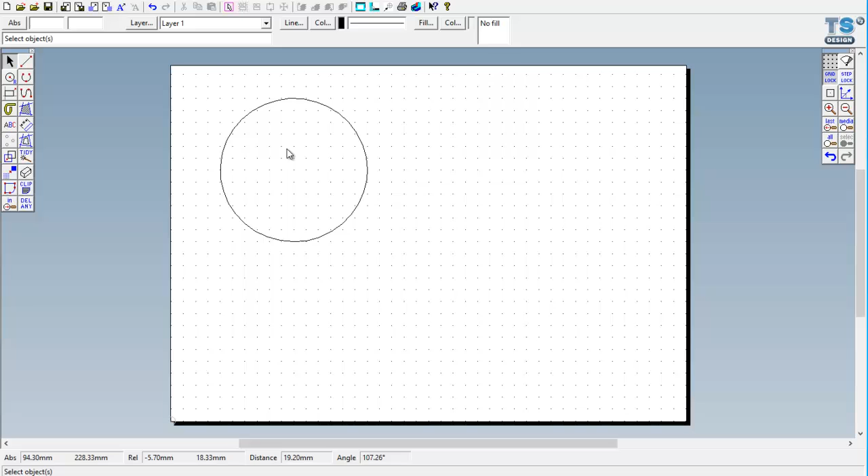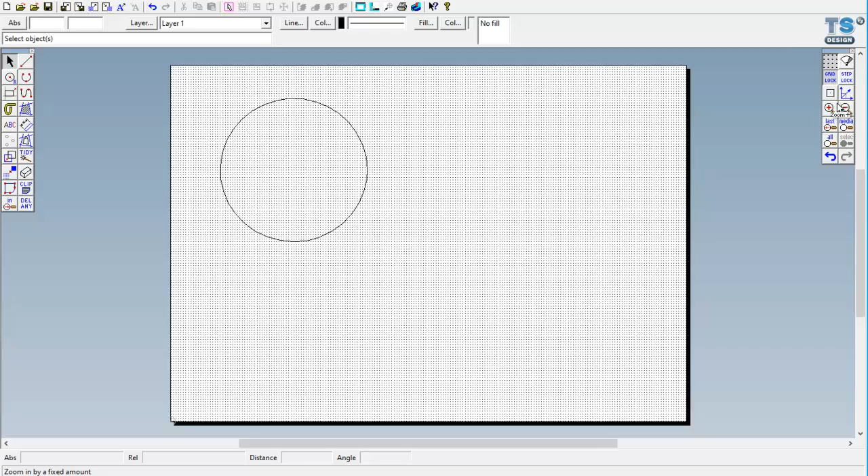At this point, I need to then make the circles or the perforations where the holes are going to allow the sound to come out of the machine. So to do that, I'm just going to double click onto the grid, and this time I'm going to change the X and the Y to 2, and that should set the grid to 2 millimeters, and then I'm just going to zoom in so I can see what we're doing a bit easier.

So the next stage then is to draw the circles that we want to go through. Now I know that the circles will need to be about 3 millimeters, so the radius in this case will be 1.5 millimeters, and I'll just click onto OK, and I can just start to draw either inside or outside. So on this part, what I can do is just click and draw each one of the holes that we need for each part of the speaker.

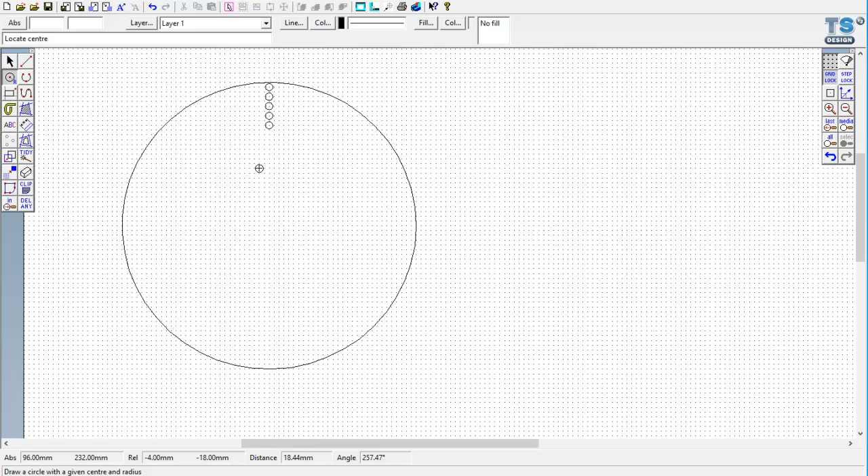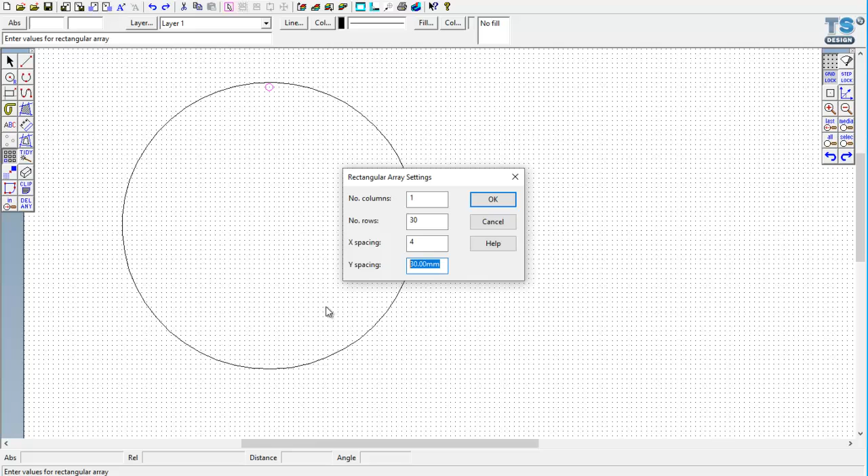Now that's going to take some time, so there is a quick way of doing this, and the quick way is literally to select the one, click onto draw, transform, rectangular array. How many columns? We just want one column at the moment. Number of rows, we'll probably need around 30 just to start off with, and the spacing, because it's set at 2 millimeters on the grid, I'm just going to change that to 4 and click onto OK, and then what should have happened is it should have made me a line of circles that I can just move down into position from here. So let's just zoom back in just to make sure we've got what we need.

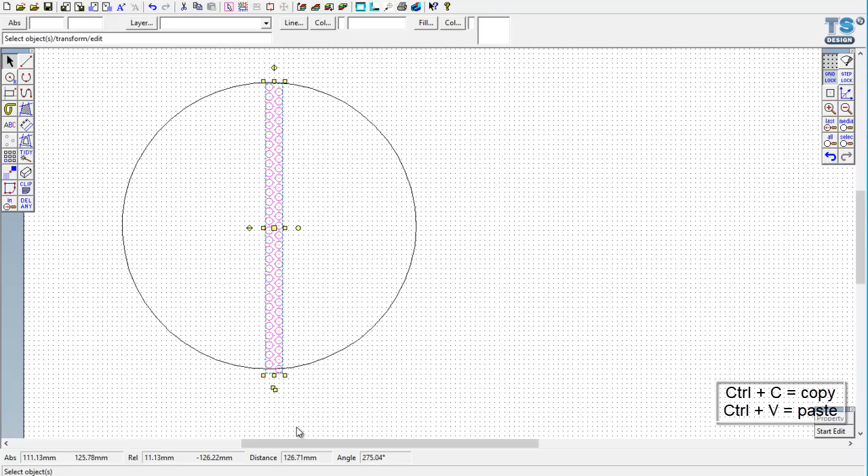Okay, so we find that sometimes it's going to cover and sometimes it's going to cut some of the lines, so I'll just see if I can move it up. There we go, and it's actually fitted perfectly into that line. Now what I shall do now is just copy that group by clicking that at the bottom, and this time I want to offset it slightly so it's actually not all in parallel. So I'll do exactly the same, copy those, and then once we've copied it, I'm just going to then place it right the way across this circle, and then we'll look at trimming with the trim commands. So again, this shouldn't take too long, so I'm just replicating each part as we go through.

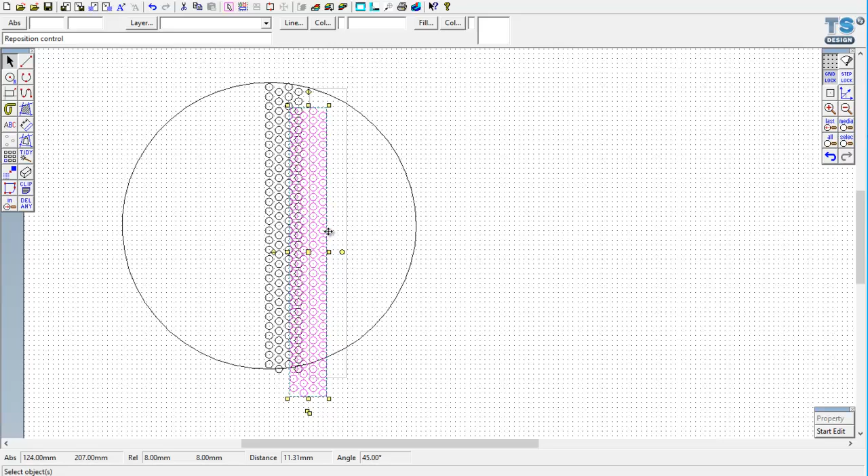Now the laser cutter works very similar to how a printer would work, so it has an X and Y axis, but instead of just printing using ink, it actually uses light just to cut through the material. So I'm just going to copy that one.

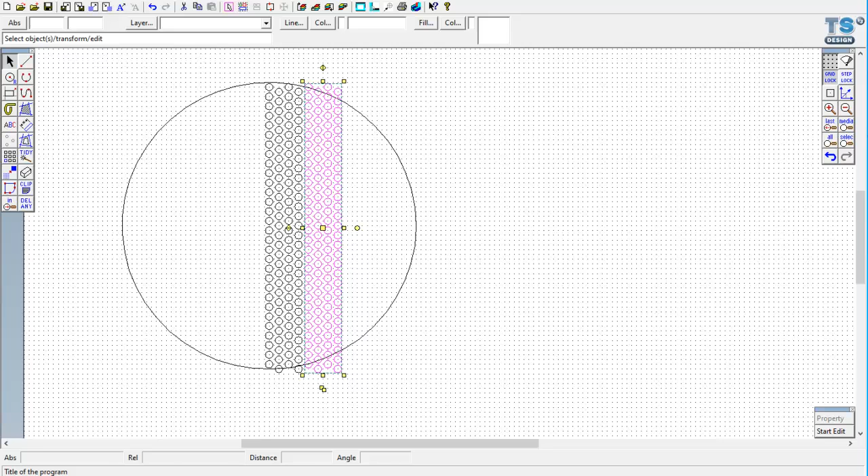Copy this part on here and move it across. So ideally, when we send this to print, we need to just make sure that we've got every line that we need to be cut out in black, because black is what's identified by the CNC DXF file as what needs to be cut out. Anything that's red would be engraving.

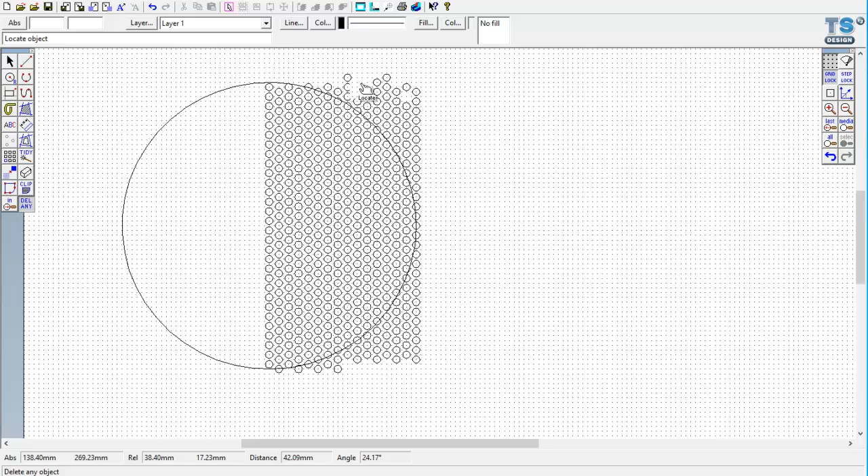Now at this point I can just delete the bits that I don't want outside the circle. And then all I'm going to do, when I get a bit nearer to the circle, is change to trim, so it'll trim but still keep the profile of the circle. So anything that's whole at the minute, I'm just going to delete these.

Now I'm only drawing it on the one side because then I can copy it and flip the drawings onto the other side. So it's just a quicker way of doing it, and that's part of the advantage of using computer-aided design over normal drawings.

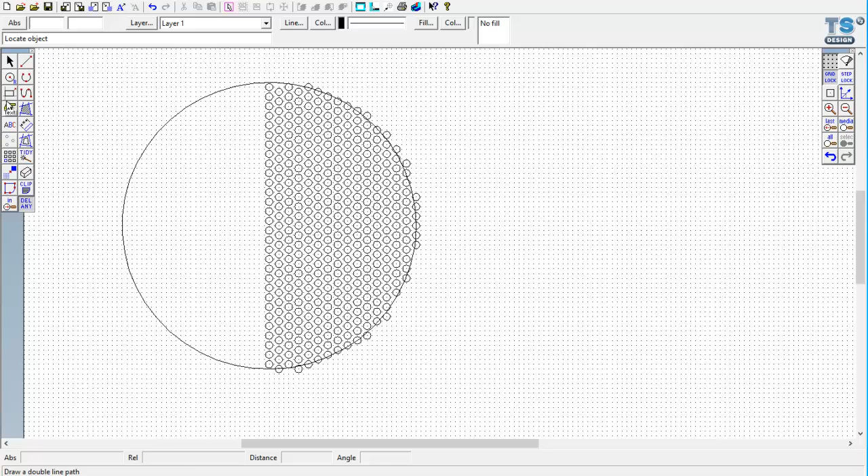If I'm doing engineering drawings and I make a mistake, then I have to redo the drawings and they're hard to modify. Using CAD allows us to make modifications very, very quickly, and also allows us to zoom in and zoom out and all the other functions that we can't really do that well with a traditional drawing board. So at this point I'm just going to delete some of the lines. Just going to the outside, I'm going to delete the ones that stick outside of the circle.

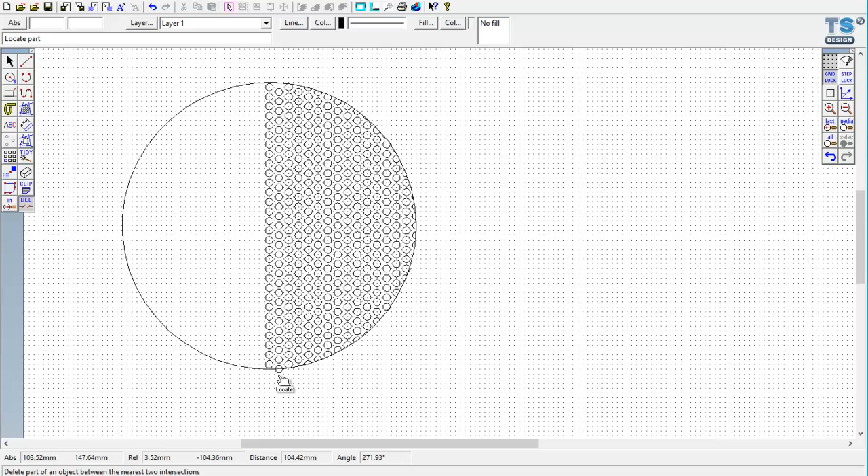Now I'm not going to delete the circle just yet, but what I should be able to do now is flip it from this point, because we know that that's the center. So now if I copy this element and copy, but then just flip it using this side, what I should be able to do is just move these circles back into place to fit on the other side.

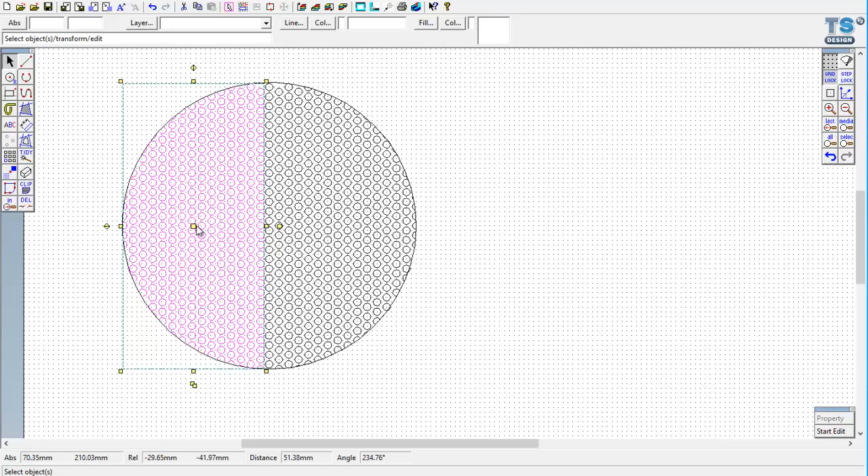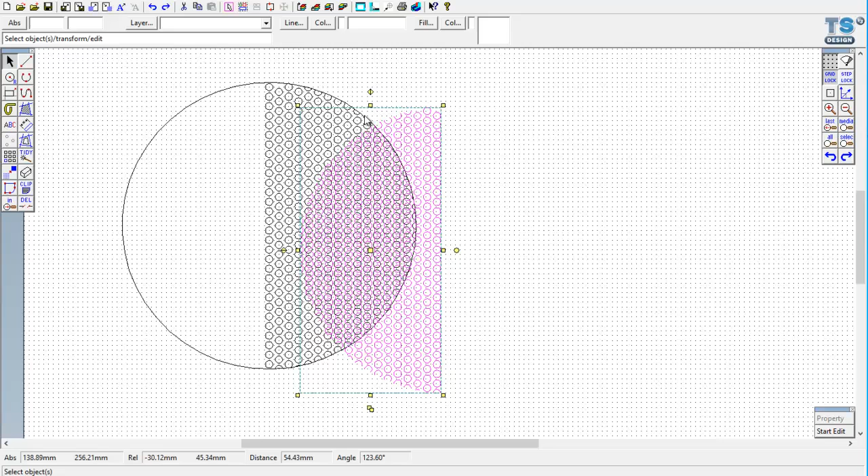Okay, now some of the circles aren't quite where they need to be, so at this point what I may need to do is move some of these slightly outwards. So if I just undo what we've just done, try it again, and then make sure that we've got the snap and the grid where it needs to be.

Still looks slightly out there, so let me turn the snap lock off and just see if we can move it slightly. So these are all the functions that we can do that we can't necessarily do when we're drawing by hand. That's still not quite that. Okay, so just slightly down.

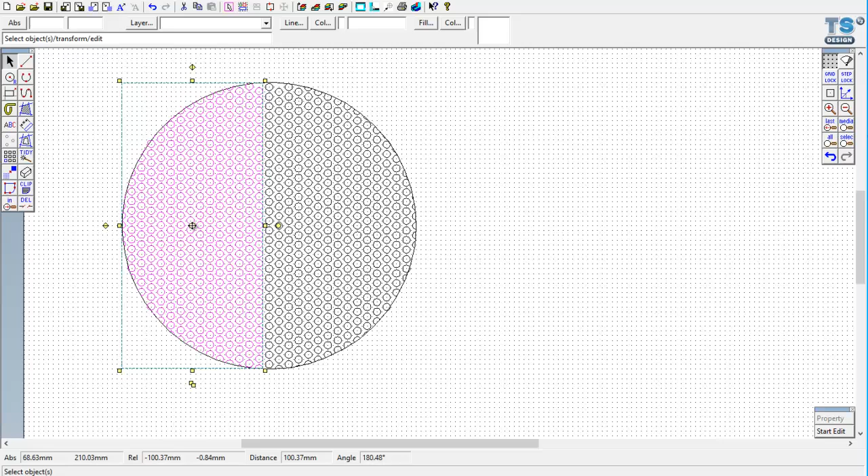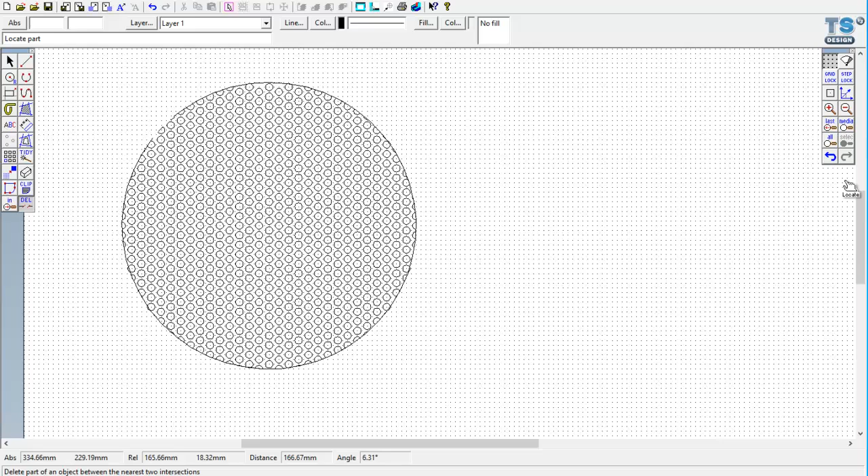There we go. So now I should be able to trim these just the same. So any line that's on the outside, I should be able to trim. So at this point, what I'm going to try and do is just delete any line that doesn't look as if it's circular. And if I need to zoom in again, I can. So anything that we don't want, we can always undo.

But it's just a case of trimming in between these spaces here, and that's going to give us the idea that there's a circle part going through, even if they're just small holes of the impression. Now we're going to be cutting this out of acrylic, and we're going to try and use a colour that's going to blend in with the decals that we've got.

So this bit is a little bit tricky, it does take time, but of course it's worth taking the time because we haven't got to worry about the time that we need to manufacture, because this will literally cut it out in probably about 2 or 3 minutes.

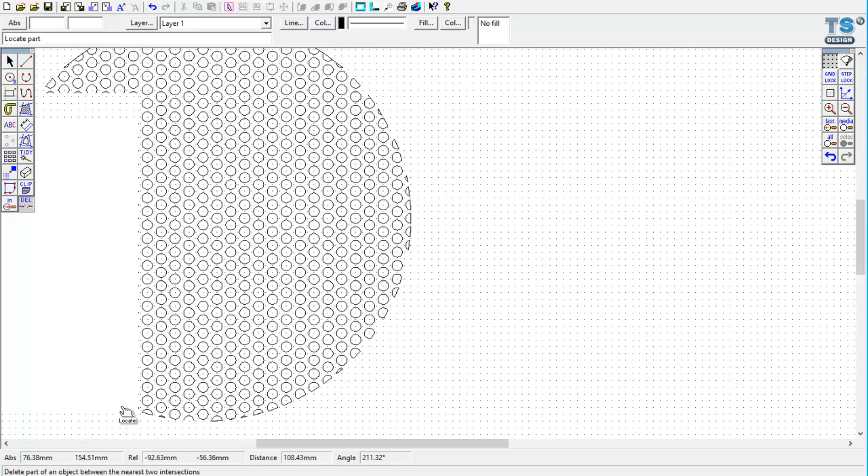Now this is really the same sort of process that would happen in industry. So a CAD designer would be making a drawing ready for the machines to cut and manufacture. And certainly with prototyping, it's easier to do it this way than to get all the tools and the machines set up to find that actually it doesn't look good or it doesn't work. So a good way of prototyping is by using CAD packages. So we're almost there.

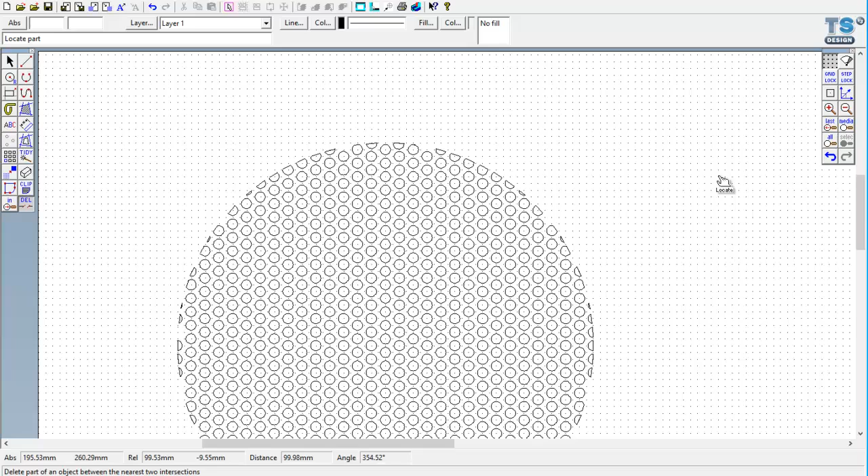Alright, I'm just going to replace that one there because I actually think we should have some more circles. So I'm going to draw these in manually. We're not far off now. So the next stage would be then to refresh the drawing just to check what we've got. So I'll hit refresh, and that's not looking too bad, if I'm honest. It's looking okay.

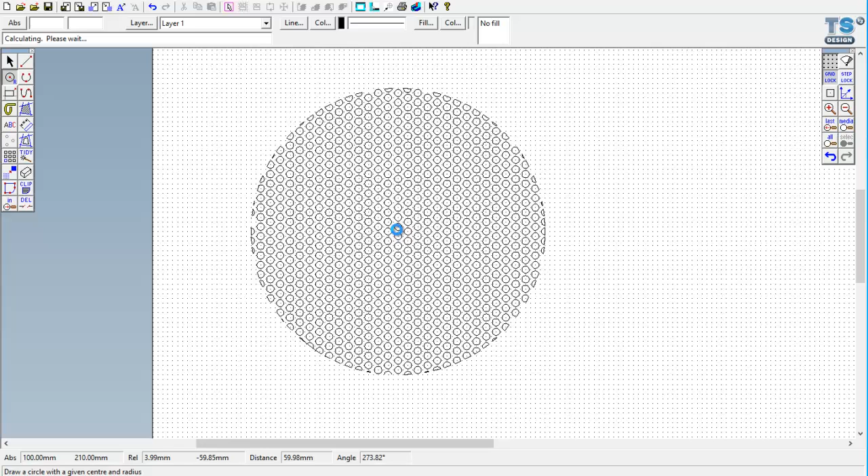Right, so at this point what we'll do next is we need to click back onto our radius, and if we set it to 126, so that would be 63 radius. Click onto OK, and if I can just find the center again, which is going to be with the gridlock, so it's going to be, I would have thought, around there. That line will engrave to make it look like it's actually a part of the design, so we're just going to change that line to red.

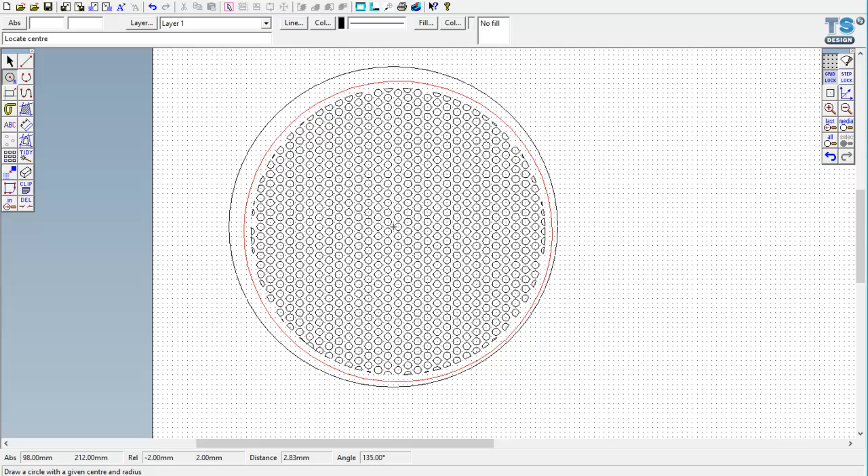And then the next line that we're going to draw, we're going to put this at 67 radius. Click onto OK. That will be the line that we cut out. So again, we're just going to find the center to draw that line out, and that then gives us another circle that will cut that out.

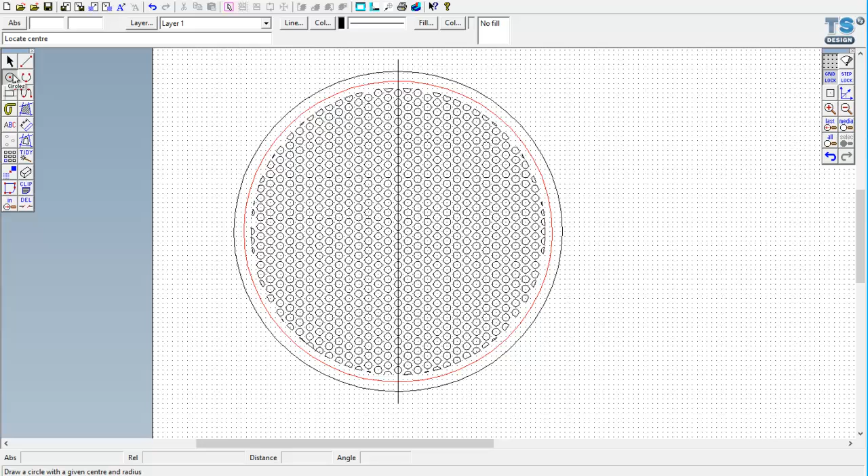Now of course we need to actually have some way of fixing this to basically the outside shell. So from there, all I'm going to do now is literally find the centers from here, draw me another circle, but this circle I'm going to do by sight just to see what we've got. So I'm going to try and snap on to where the gridlock is, and even though it's not in the middle of one, that's fine, and I'm just going to click onto an outside rim from there.

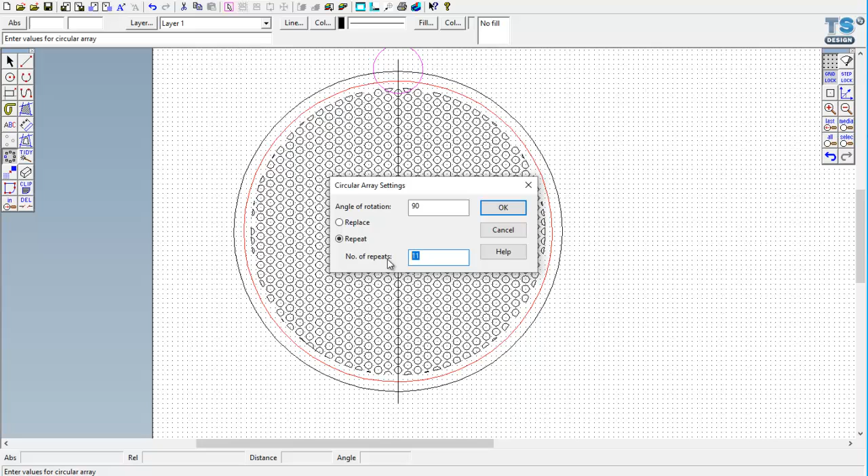Now, to try and get them equal around each side, all I'm going to do is now just click onto this one, go to draw, transform, circular array. We want them at 90 degrees. How many repeats? We would like 4 of them. Click onto OK, find the center again, and that should have put all of these into that position.

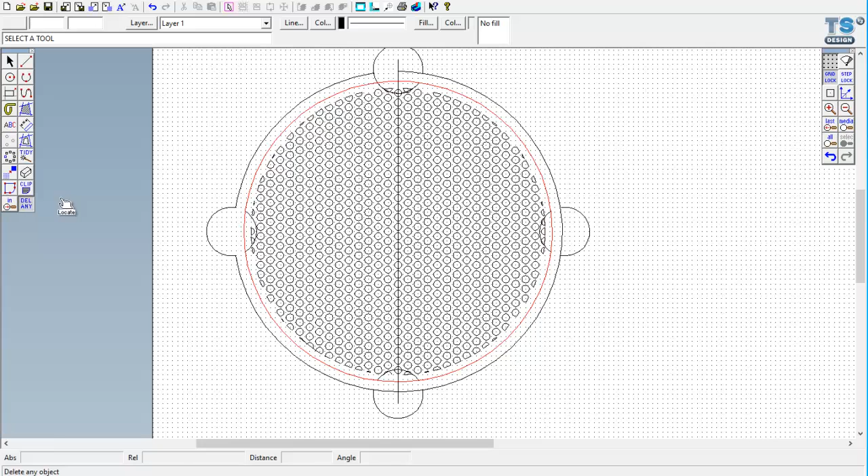So again, from that point, all I'm going to do now is just delete the lines that I don't need from here on in. So we don't need that part, that part, that part. Now I'm just going to trim these parts just to break the lines, and then I'm going to change it back to delete, and then we should be able to just delete the parts in full. So just by clicking back onto there, if I click onto these parts, it should start to delete all the lines that I don't need. That one it might not because I haven't trimmed it properly, but that one's okay, that's fine.

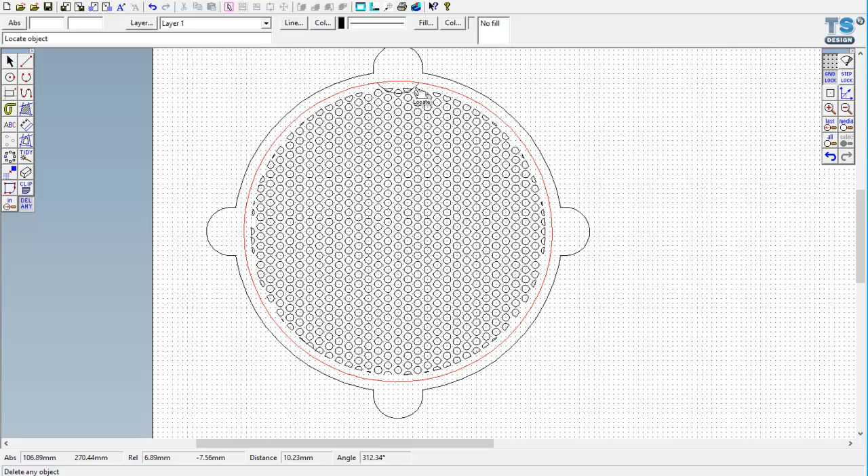Back to the trim command. We don't need that line, don't need that line, don't need that line, and we don't need that line. Okay, so back to delete and click just to delete those lines. So there may be 2 there. Brilliant.

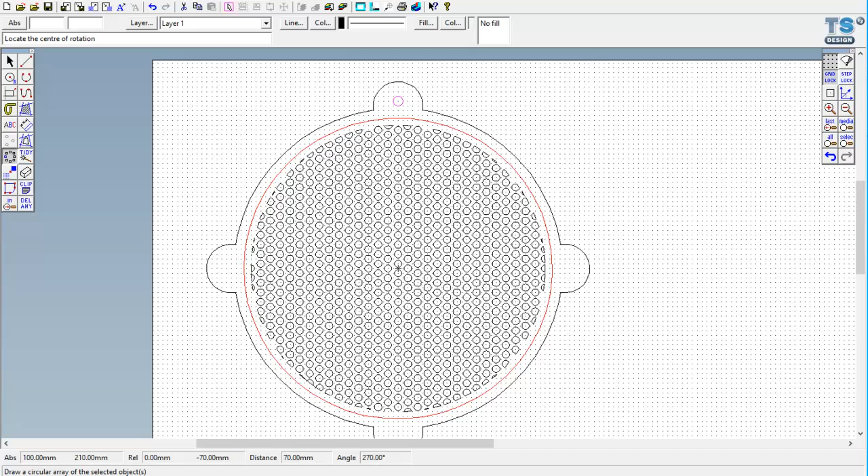Okay, so the next stage is to put the screw hole in. So now we know what they're looking like from here. So this time I'm going to go back to radius. We'll have a 4mm hole this time to be countersunk. So that will be a radius of 2. So if I click onto OK, find the center, click onto that point, go to draw, transform, circular array. That's okay, it's still the same. We need to find the center, and it's actually put the holes on there ready for us.

So within 5-10 minutes we've managed to create a speaker housing that we can use on our arcade machine, and that's ready to be laser cut. So the next stage will just show us how we laser cut that out. So to do it, we need to convert this file. So first of all, I'm just going to save the file, and we're going to save it as arcade speaker 1.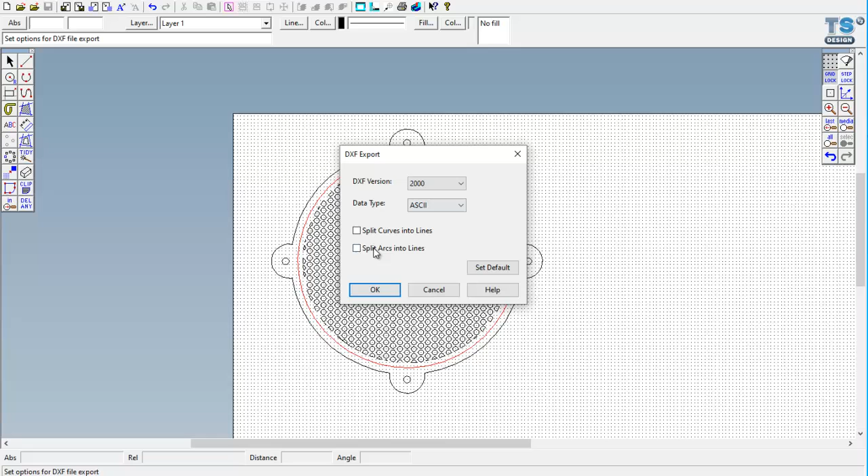Save. Now that's saved it in this format, but the machines that we operate on need to have it converted to a different code. So we'll need to export it as a DXF file. So I'll just click onto Export File, Arcade Speaker 1 DXF file, click on save. We're using ASCII as it's an American program. Click on OK, and that's now ready for us to cut.

So we're going to have all these circles cut out in the center, the screw holes cut out, and that's going to create a speaker cover similar to this, but at a fraction of the price.